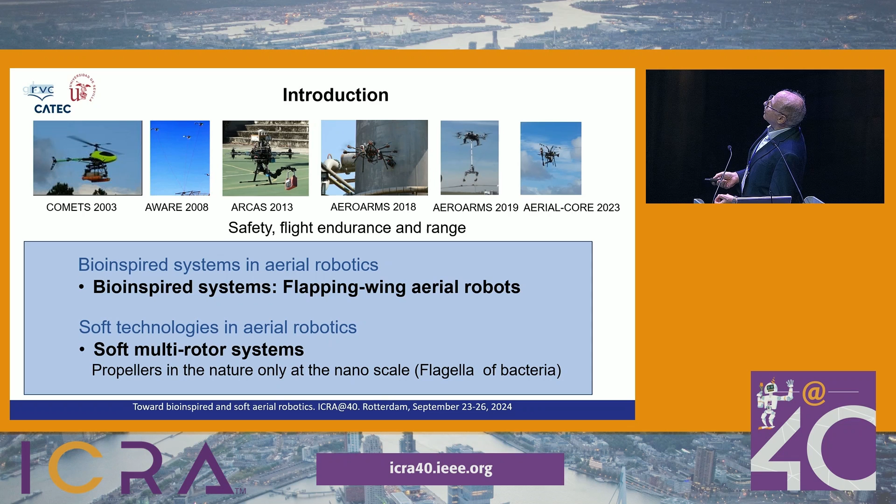Then we went to aerial manipulation. Aerial manipulation means flying and manipulating at the same time. We developed in the ARCAS project the first general purpose aerial manipulation system. And then later we applied it not in the lab, but industrially, for the testing of wall depth by using an ultrasonic sensor.

Then we went to manipulate with 2 arms, and finally in the last years we had several experiments on the inspection of electrical lines, not only flying, but perching on the tether and then rolling over the tether, combining locomotion modalities to save energy.

But the main problems of all this, I would say, are 2. First is the safety, very important. It is very difficult to get permission to fly, but also because it's unsafe in many cases. And the second is the flying endurance and range, which is related to the energy, of course. We have more problems in some kinds of locomotion than in others. It is possible to land and roll and so on. But anyway, these 2 problems are very important in aerial robotics.

Then we went to bioinspired aerial robotics, which for us means flapping wings and other mechanisms that I will try to summarize. But at the same time, for some parameters like agility, it could be good to have multi-rotor systems. But we wanted multi-rotor systems interacting with people. So that means soft. We don't have in nature, only at the nanoscale for bacteria, this full rotation of the propellers. So I cannot say that this talk is fully bioinspired.

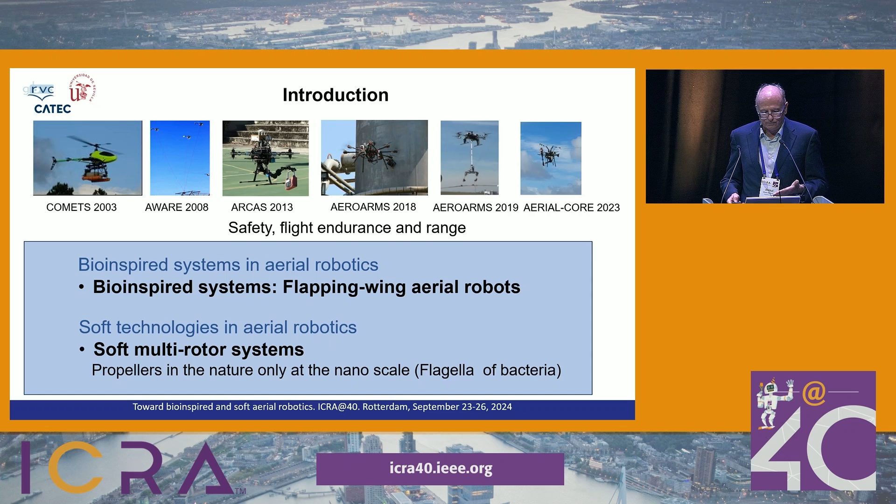Then we went to this advanced grant of the European Research Council, which is Griffin, and we developed all these methods for the flapping wing, including the design, modeling, actuation, control, perception and autonomy, and also the perching and manipulation. I will try to summarize some of these results in this talk.

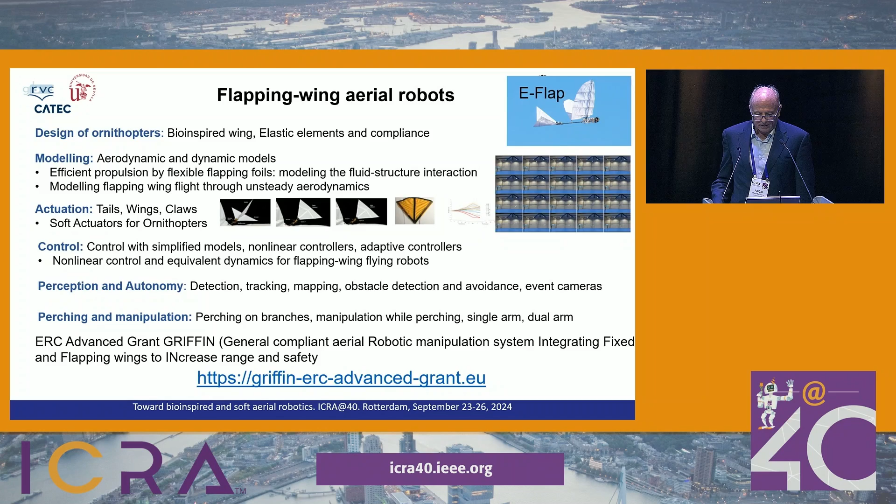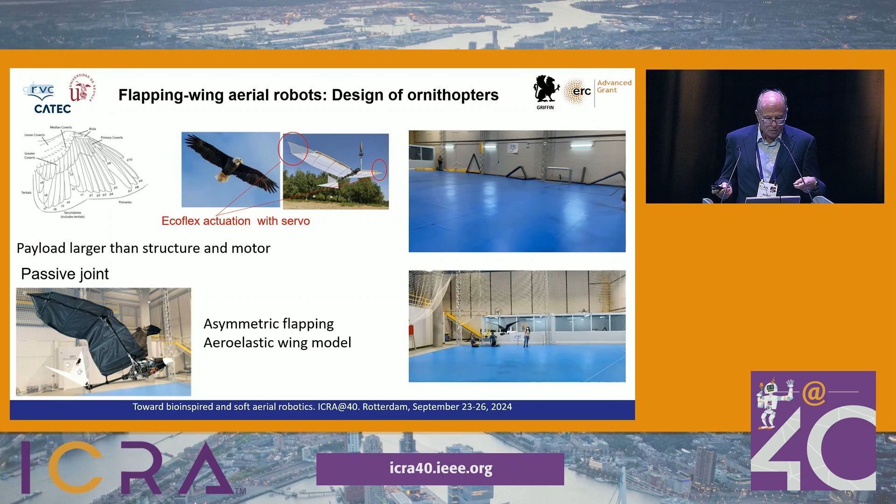So first, let me go to the flight. Not only flapping, but we also added some components to have more payload and more energy efficiency, imitating the birds, like this actuation in the tip of the wings, or also the passive joints. And then we wanted to compute the energy efficiency. You can see flying outdoors, wind is critical, very important. We did many experiments, and you can see some comparison with the multirotor.

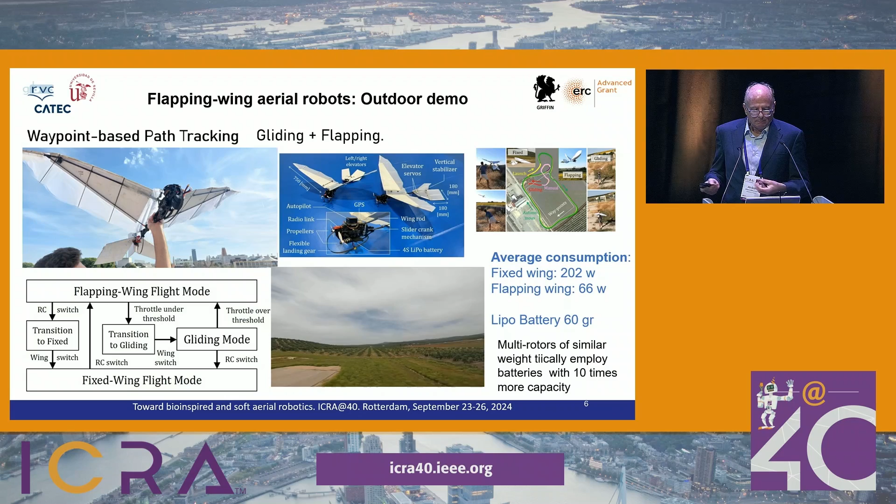There is no possible comparison with multirotor, it always wins, but people care about the comparison with the fixed wing. You can see some numbers there; we put some propellers, fly with this system and compare flapping wing with gliding. The ability to glide is very important. But of course, you need more intelligence to glide, sensing the wind and so on.

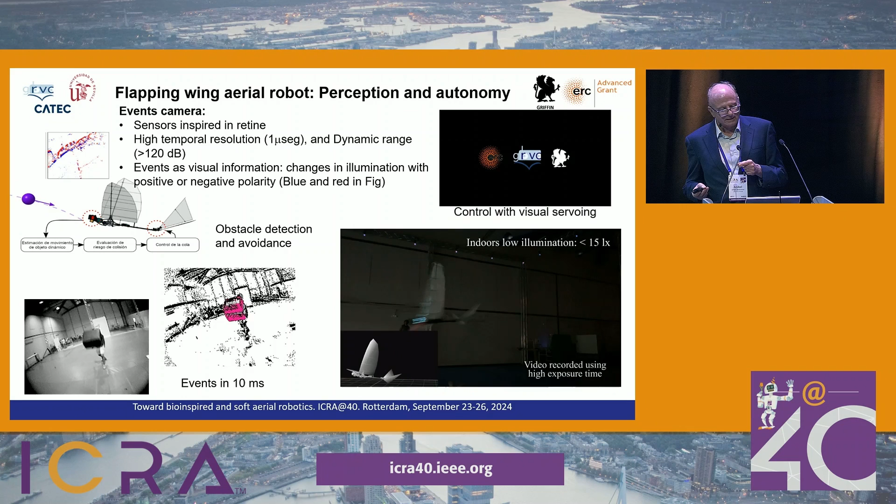Then we wanted to put intelligence on board. That means we use event cameras. Event cameras were very important due to their properties, also bioinspired. We were able to close the loop, visual servoing, to guide the system, but also to detect and avoid obstacles by using this event camera. So it was, again, the first doing that.

Then we went to perching. This is much more difficult than perching with the multi-rotor system. You can see the oscillations here. This is very difficult to control and to cancel the perturbations. So we needed to compensate in the last meter by using this leg with a degree of freedom, by using visual servoing. And in parallel, we developed a bioinspired claw that I have no time to present here.

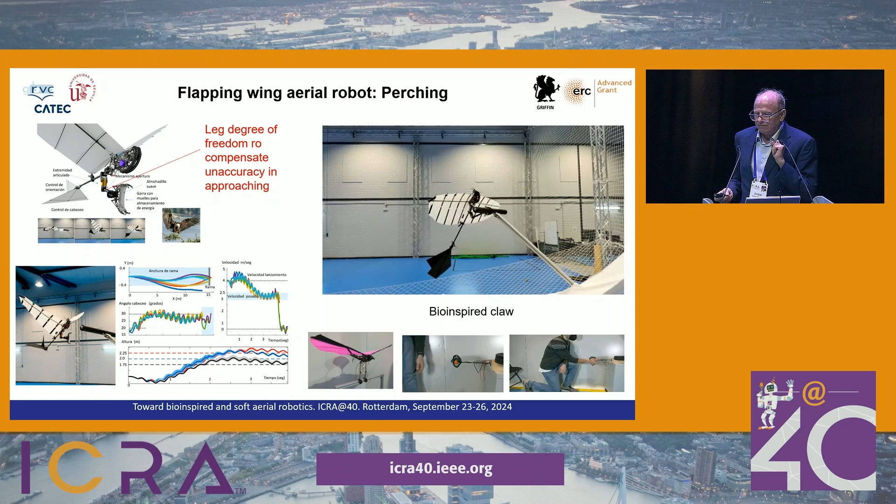We wanted to have not only that, but also manipulation. So we developed different beaks, manipulation sensing with the beak, but also manipulation while maintaining the equilibrium, which is difficult. We put a very light manipulator on board the birds. And finally, we put two arms to manipulate, being able, for example, to take samples of stems and leaves.

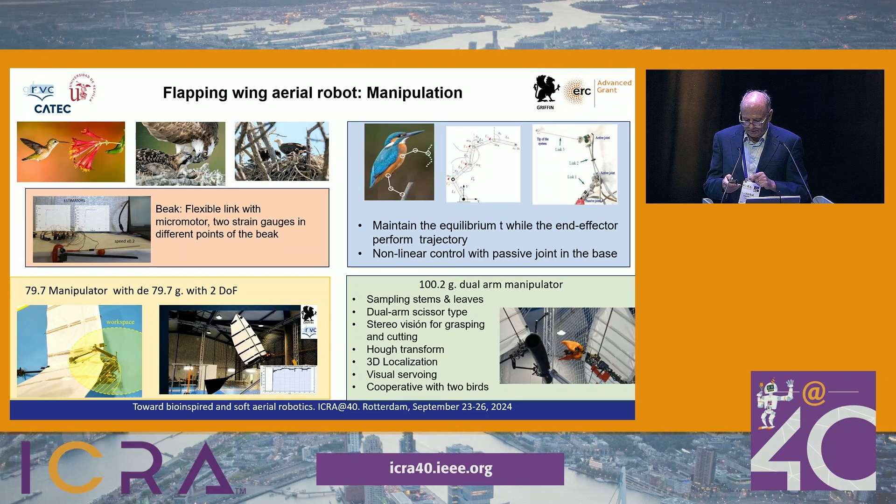And finally, the cooperative manipulation between two: one perches near the other and passes some samples. So these are some of the topics we have been working on, and I need to pass immediately to the soft multi-rotor system, which is the second part.

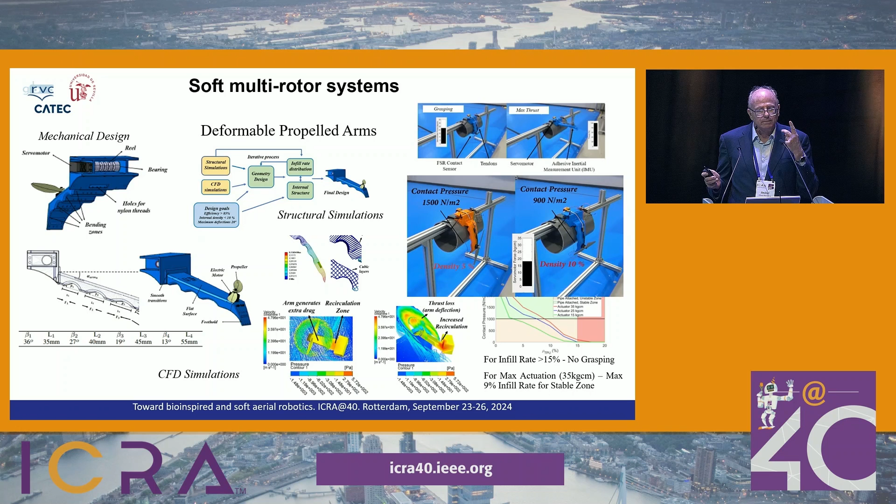So here the critical aspects are related to combining the flexibility of the body of the arm and the variable stress of these arms with the propellers, and being able to control. The design was very important, combining in the design the mechanical property, the resistance with the propellers, and the aerodynamic properties. We have to combine both of them, and of course we have to control.

It was difficult to control because, as I mentioned, the deformation with different stress in different parts, and then the vector of the propeller needs to be compensated, taking into account the model of the deformation of the arms. So everything is model-based. And finally, we were able to control modeling, with a relatively very simple controller, but good modeling tools. This is what we did.

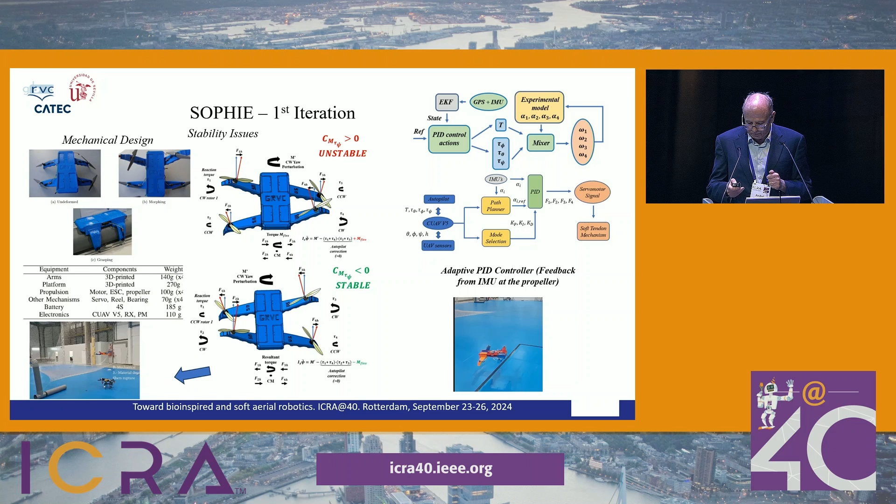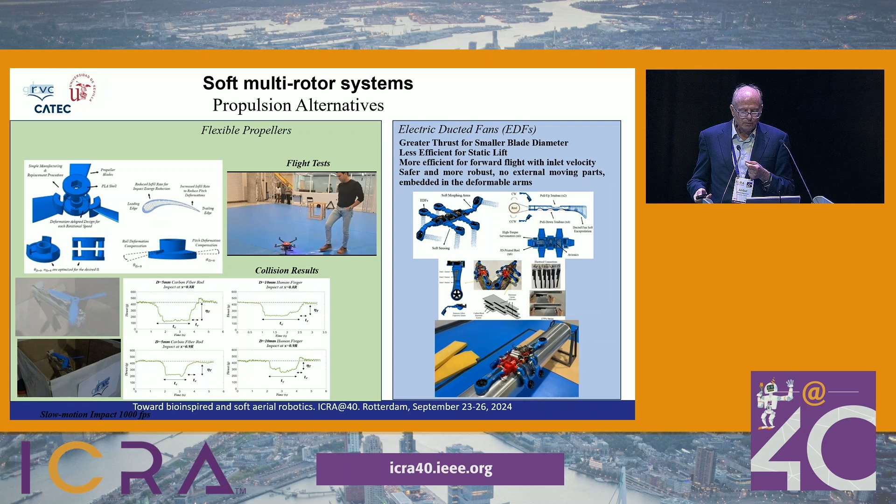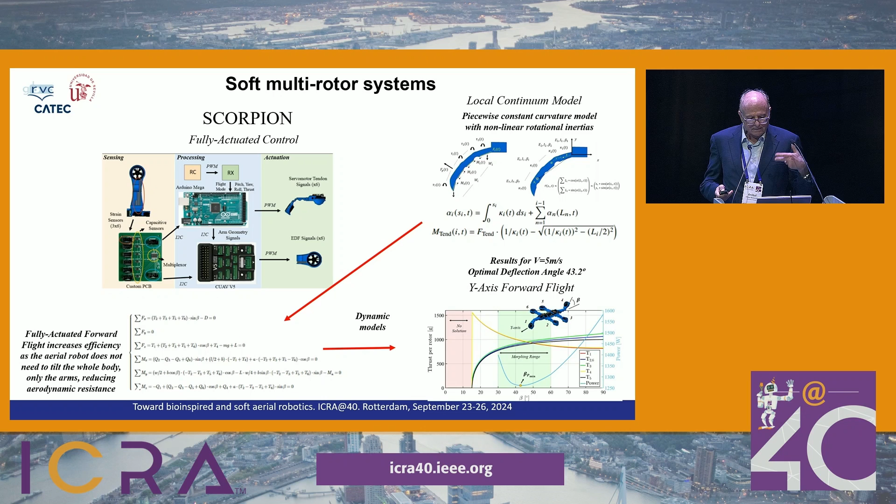And then we went to two typical things that you will see. The first, for sure, in the presentation of Antonio Franchi, will be the fully actuated systems that are able to exert forces in any direction and don't need to incline the body to move. So we did that with the soft systems, and at the same time, we did the perching. Perching means many different kinds of perching with different prototypes that you have seen in the previous video.

Again, we have to take into account for the perching the aerodynamic effect, and particularly the ground effect. Obviously, the force that you have to exert depends on the ground effect, and also the Coanda effect. So we model, and finally we are able to have this perching in different kinds of surfaces, adapting the body to different surfaces, which is not trivial.

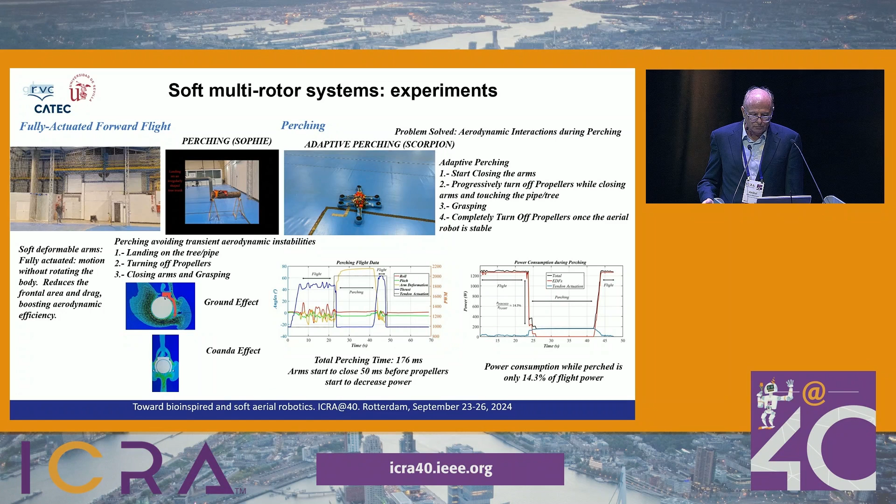Okay, I promised myself to be within the 10 minutes. So I will be within the 10 minutes, but still I have some comments as conclusions.

Conclusions: first, for the bio-inspired system, the flapping wing, I think that we did safe and efficient flight and perching and manipulation, but we need to solve some challenges. Very important, flying with the optimal use of the wind. Not only rejecting the wind perturbation, as we typically do in aerial robotics, we have to use the wind to move the body as the birds do. And also, we have to improve the manipulation capabilities.

The second, in the soft part of the multi-rotor system, we have to increase the safety. And so we want to have perching on the body of people, interacting physically with people, perching on the body without hurting them. This is obviously one of the challenges. And the others are increasing the intelligence and the range and time of flight.

So just to conclude, my last comment: in all that I have presented, there are a lot of physical models, kinematic, dynamic, aerodynamic, material science models. But at the moment, we did not apply artificial intelligence learning, but I hope that with the help of many of you that I have been interacting with, and having attended the very nice presentations, we will be able to do it. Thank you very much for your attention.

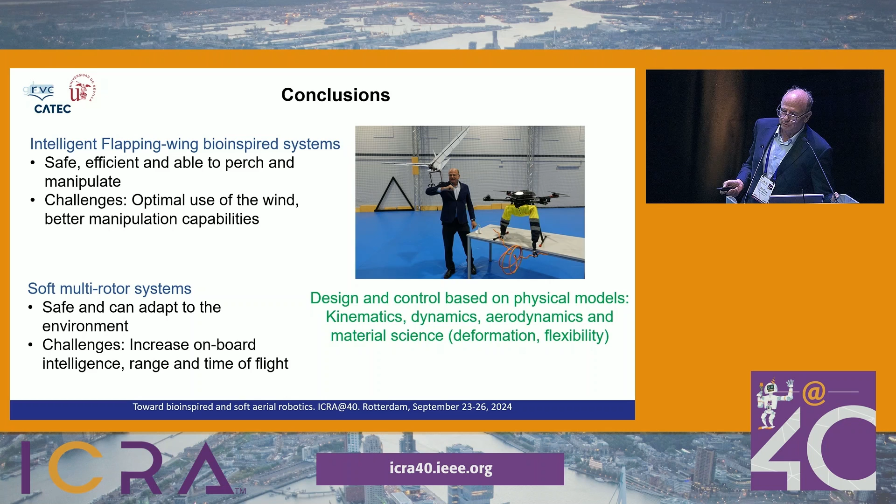Thank you, Anibal. Questions from the audience? Thanks a lot for the nice presentation. As someone that works with multi-rotors, it's very nice to see the soft designs; it makes me feel a bit encouraged about multi-rotors. So I want to ask you, what is the main challenge for these systems to be reliable and become more of the main trend in multi-rotors?

Okay, reliability is always a main problem. We have to demonstrate that this system can be safe, for example, landing on the body, touching the person to measure some parameters, like the blood pressure, and performing this kind of interaction. So this is a very important physical interaction that nobody did. I think that this is possible, and we can demonstrate this kind of properties.

Of course, we still have to be efficient from the point of view of energy, which is, by the way, not trivial. Being at the same time very efficient and soft is not always trivial. So we will try, but I think that there are many challenges that depend on the properties of the material and how we control the material to adapt as the animals do. So bio-inspiration again. We need also learning. Yeah, we need learning.